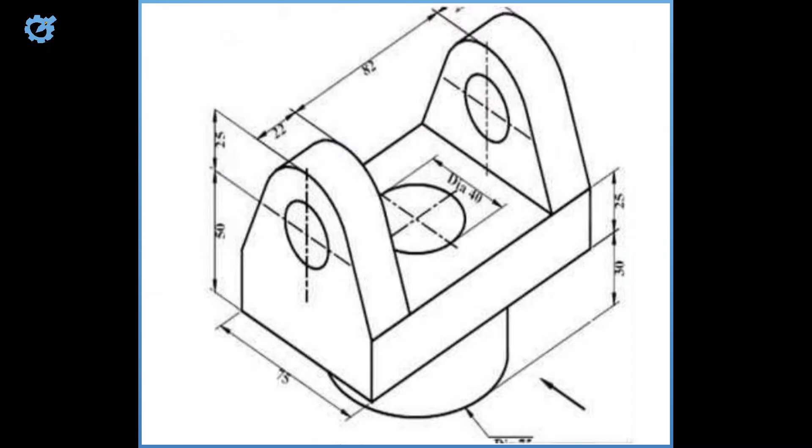Right, for today we'll be considering the problem as displayed on the screen in first angle orthographic projection, and our front view is going to be taking the direction of the arrow itself. So to place my front view, the very first thing I'm going to do is to produce a thin horizontal line in this order, as you can see on the screen. That's it, that horizontal line in that order.

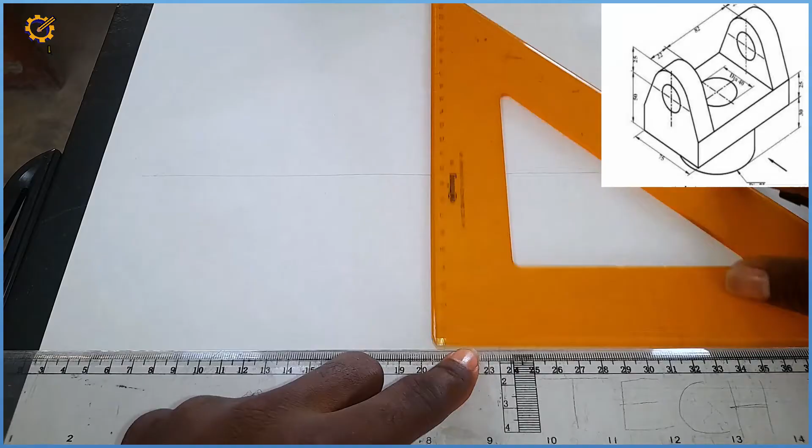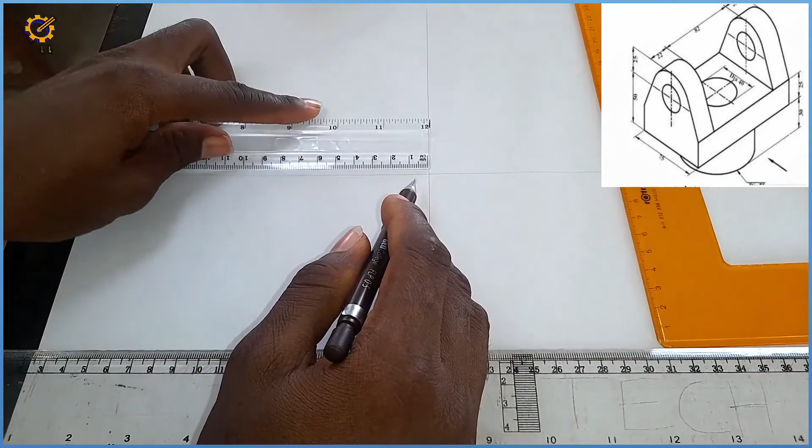Then I'm going to produce a vertical line to it like this in this order also. So that is settled like that. So what's the next thing I'm going to do? The very first thing I'm going to get is the total width of the front view. I'm having a mark of 22, 82 and 22, so that is 126. So from this area here, I'm going to measure a length of 126 towards my left hand side. So 126, which is this. I have that mark of 126 like that.

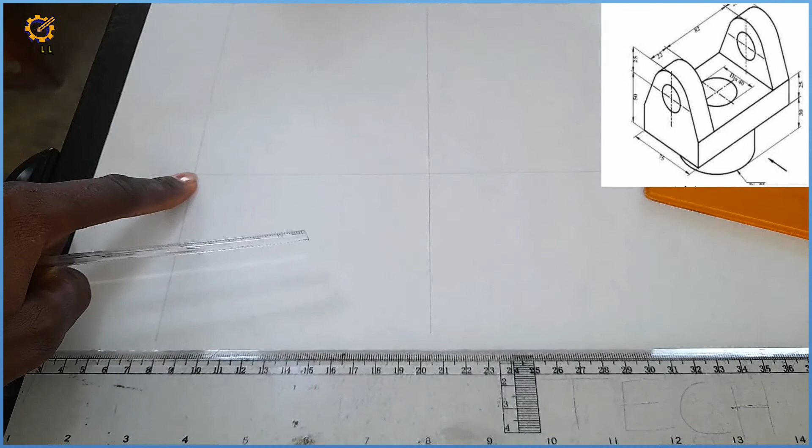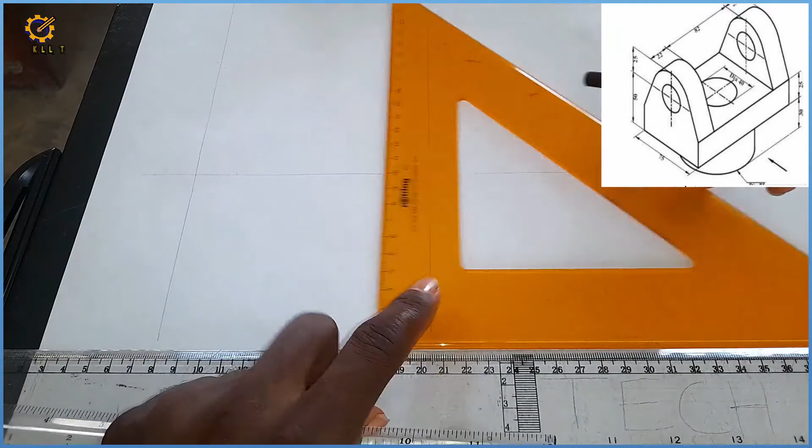So I'm going to project it vertically. So this mark to this mark is 126. Take note of that. Now from this edge, I'm going to measure a mark of 22, which is this. And from this end here inwards, a mark of 22, which is this also. So those marks of 22, I'm going to project them vertically also. So that is settled.

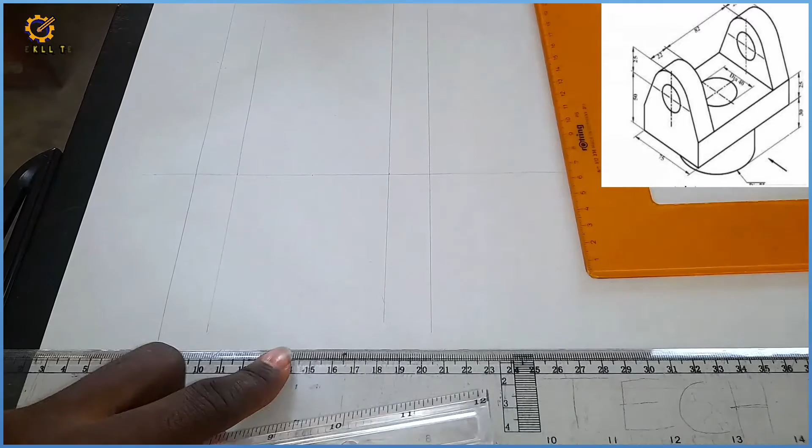So I'm going to get the midpoint of this width of 126, and that is going to be 63. So a mark of 63, which is this. Then I'm going to project that mark vertically. All of these lines I'm drawing are faint lines. They are thin continuous lines.

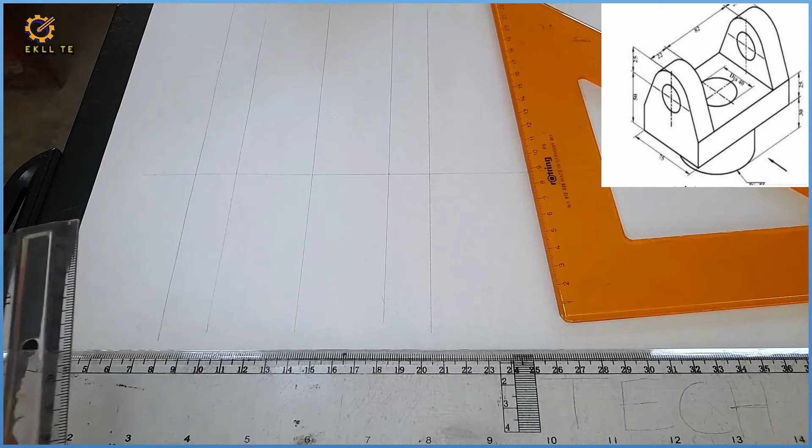So after doing that, the total height of my object here: the cylindrical part under the object is a diameter of 75, and the height there is 30. So height of 30 together with the thickness of the base, which is 25, and the 50 upward, that's 75 plus 30, a height of 105. Total height of 105. So from anywhere on this vertical line, I'm going to measure a height of 105 with my ruler, which is this. Can you see that? So I pick that mark of 105.

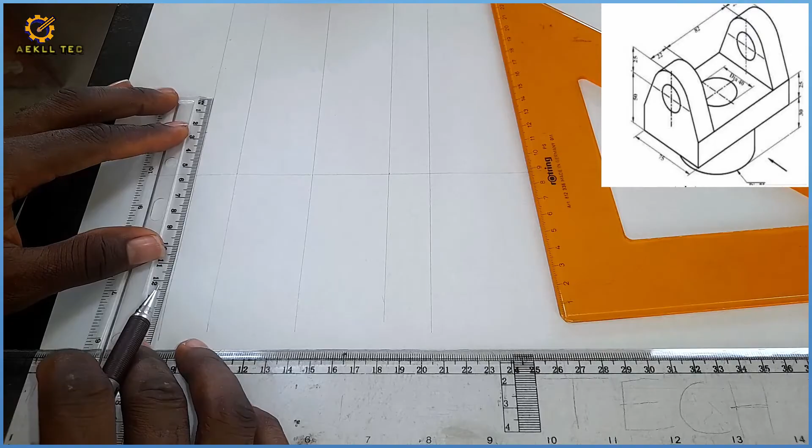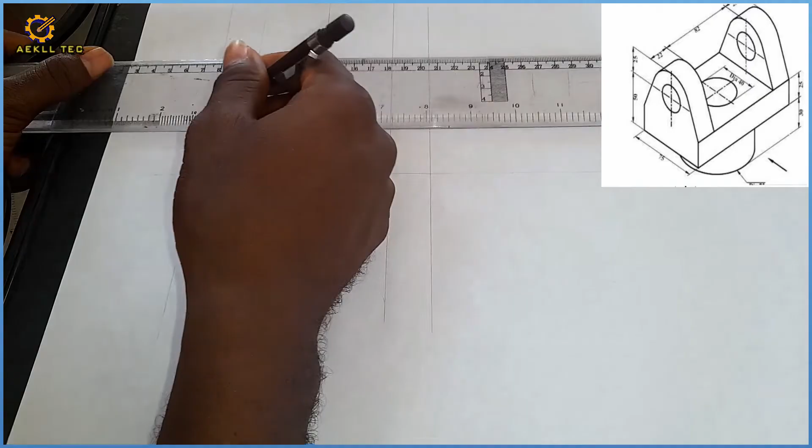From this line, I'm going to measure a height of 30, which is this. Then from that mark of 30, I'm going to measure a mark of 25, which is the thickness of the base itself. So each of these points I measured vertically will be projected horizontally. First, the mark of 30 is going to be projected horizontally like this. The mark of 25 here will be projected like this, and the mark of 105 will be projected horizontally like this. So take note of that.

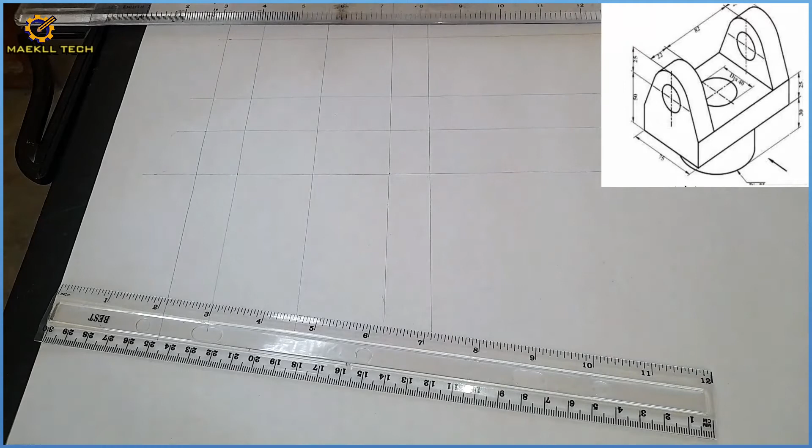Now the cylindrical part under the base is a diameter of 75, and that is going to be a radius of 37.5. So with my compass, I'm going to pick a distance of 37.5. And that is it.

I'm sorry for the noise. My place is close to the airport. Please, I'm sorry for that.

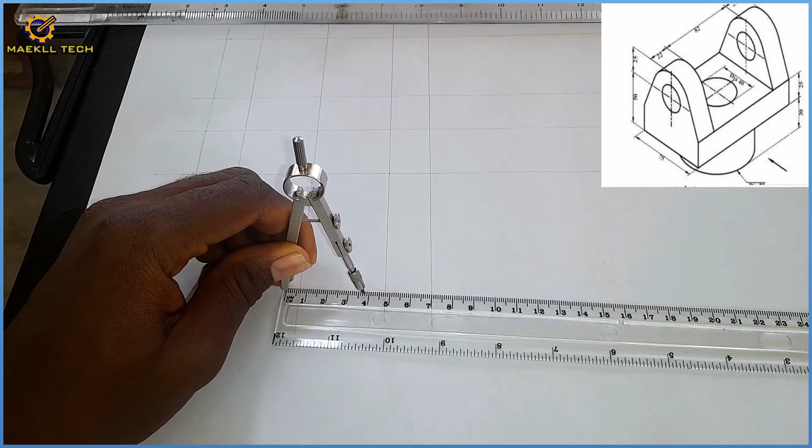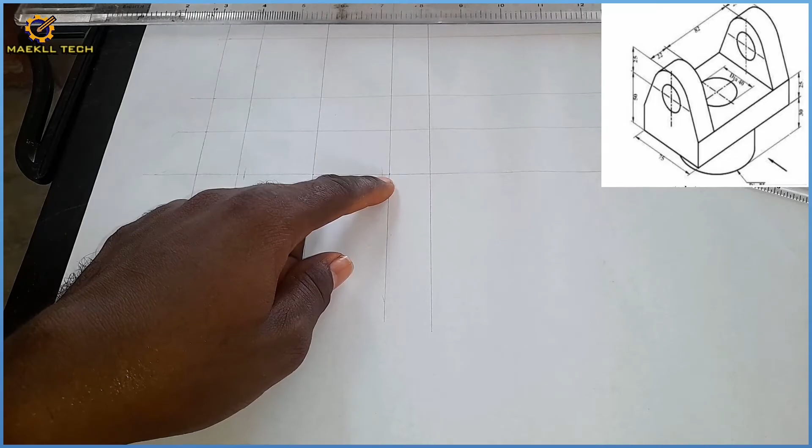So I have my 37.5 on my compass. Take note of this. From this point here, I mark right and left. So the distance from here to here now is 75, as it is on the screen. So what am I going to do now? I'm going to project that mark like this.

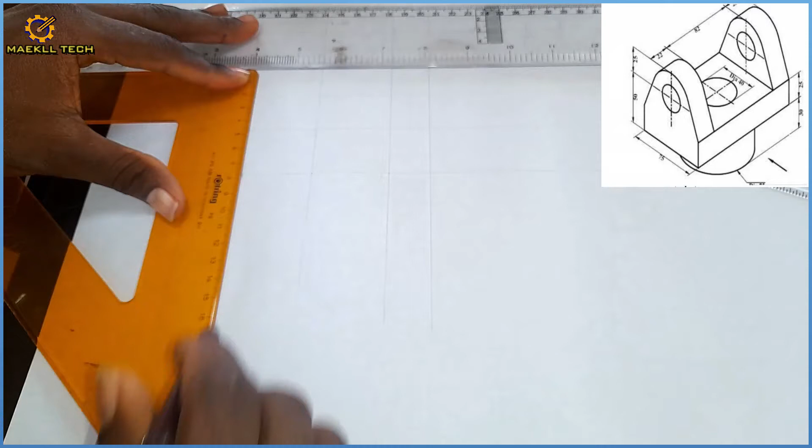Take note of this. I told you the height of that cylindrical part is 30, and here to here is 30. But still I'm going to project it from the mark of 30 downwards, faintly first, then like this also. So I think I can thicken this area like this now. Let me thicken it, and the whole of this area like this.

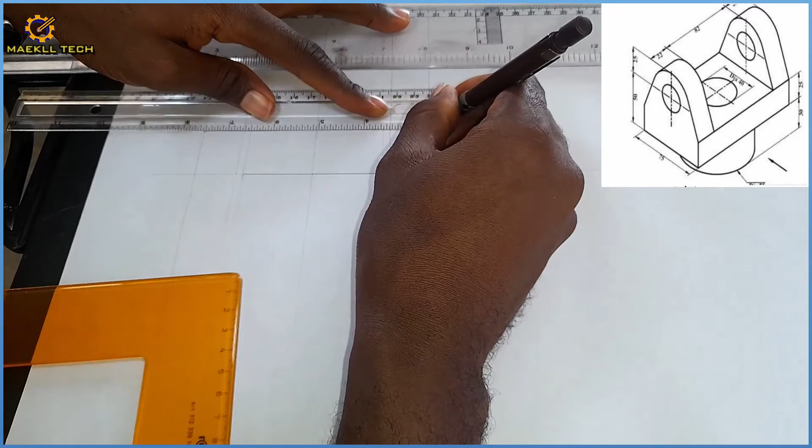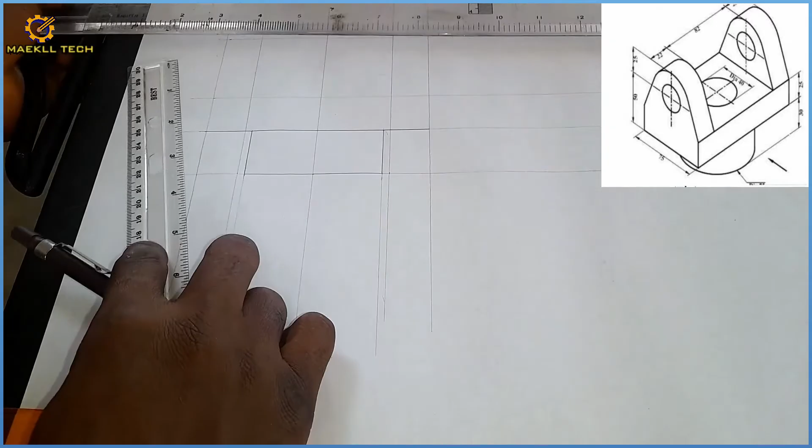All right, so likewise this will be thickened, and this will be what? Thickened. Okay, you see it's coming up bit by bit. Okay, so I'm going to actually enclose this area like this. Take note of that also, like this.

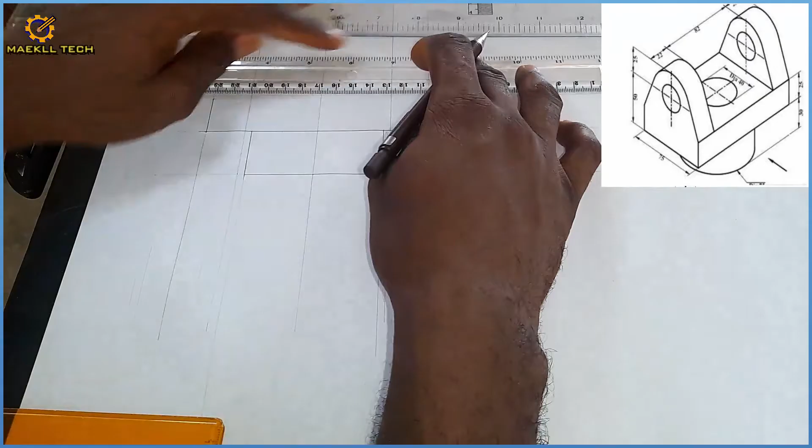All right, so orthographic projection is one of the cheapest concepts in drawing, okay, because it is what you see that you draw. So don't make life hard on yourself. It is what you see you draw. Now take note, you notice that on this base we have a circle of diameter 40, and that circle is all the way through to the bottom here. So diameter 40, that will be radius of what? Radius of 20. So I'm going to pick my ruler.

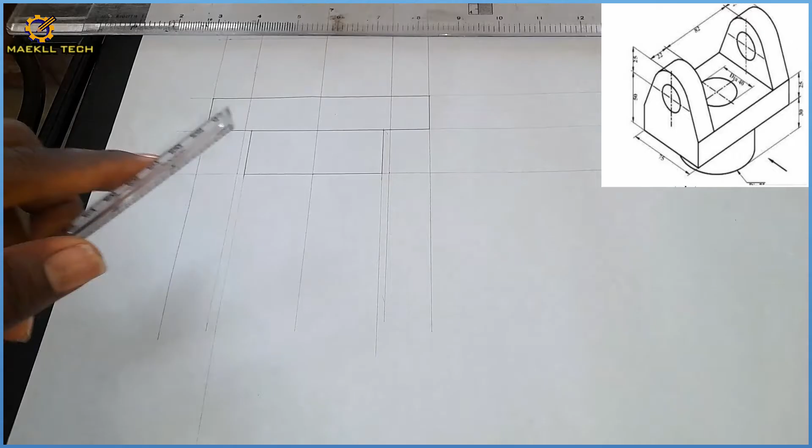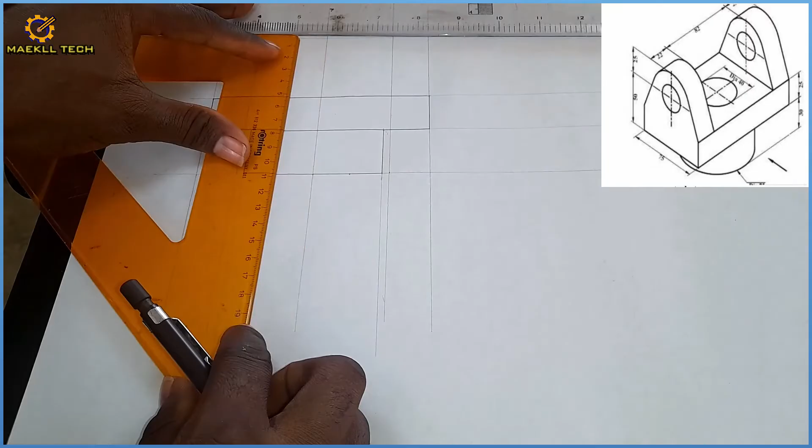With my ruler now, from this midpoint, take note of this, I measure 20 towards the right hand side and 20 towards the left hand side. So 20 plus 20 equals to what? Equals to 40. Take note of that. So I'm going to project that also like this. I'm going to project it all the way down faintly, and hey, sorry, I've drawn rubbish over there. I'm going to correct that. So I'm going to project it all the way here also, downward faintly.

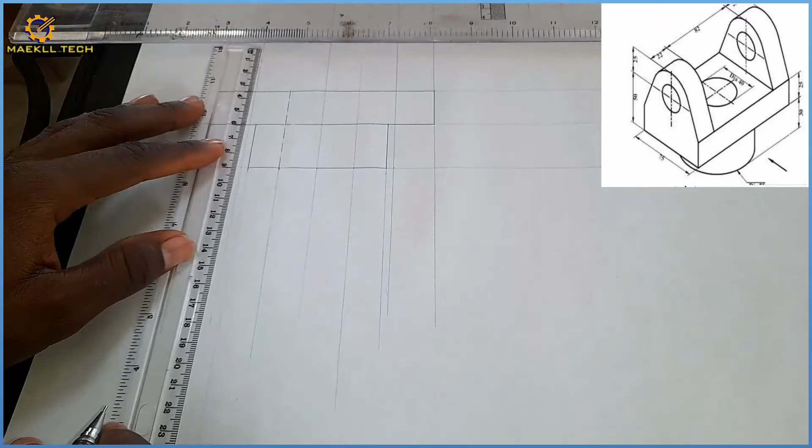Okay, now distance from here to here is the 40. I can't actually see this hole from the outside, but if I check this object from the plan, I can see the hole. So on this front view, that area is going to be what? It will be hidden. So I'm going to represent it with short dashes. Okay, all right, with my short dashes. So take note of this. You see in that order. Do you see that? So I'm going to do the same thing here, that mark of diameter 40. So do you take note of that? So that is how this area is going to be like that.

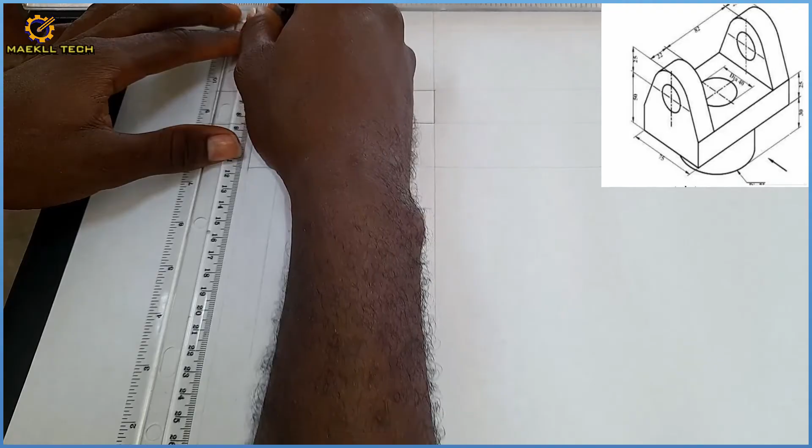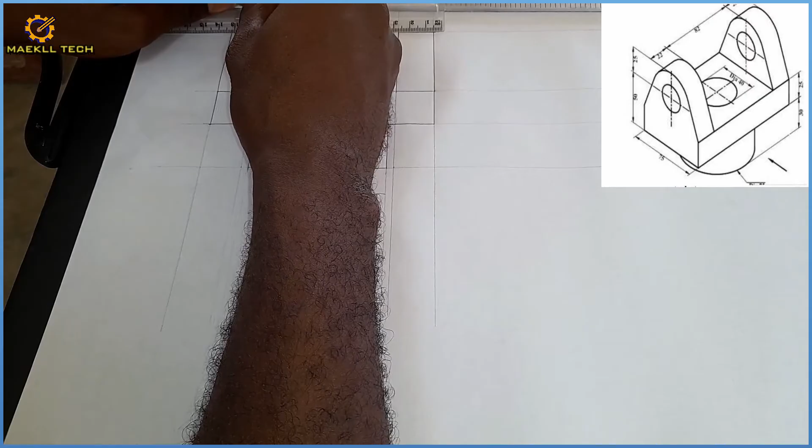Are you following? Now, to finish this area at the top, I'm going to thicken this like this. Take note. It's going to look this way, and this to this mark right here. Take note of that. This like this, then this from the top to that level. So I'm going to enclose this like this. Okay, and I'm going to enclose this like this. I'm going to enclose that like that.

So now on this front view, on this area and this area here, if you look at the object, we are having two cylindrical holes there. Okay, and we are not given the dimension for those holes. So I'm going to assume the diameter for that hole to be diameter 25. So take note, I am producing this drawing on a scale of 1:1. I am producing it on a scale of 1:1.

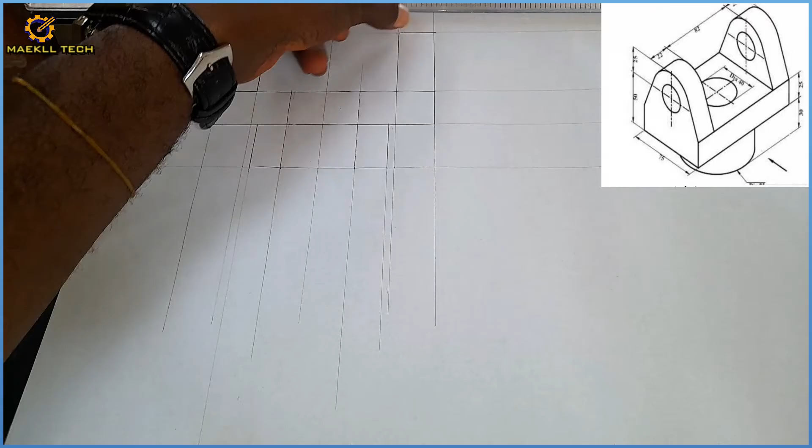So if you have to produce your own on scale of 2:1, you are going to multiply every dimension given here by 2. What does that imply? That implies that this area to this area, that is 22 on that question, will be 44 when you want to draw it on 2:1. This area to this area, that is 82, is going to be what? 164 on 2:1. Take note of that. All right, so I'm drawing this on 1:1. So the next procedure is this.

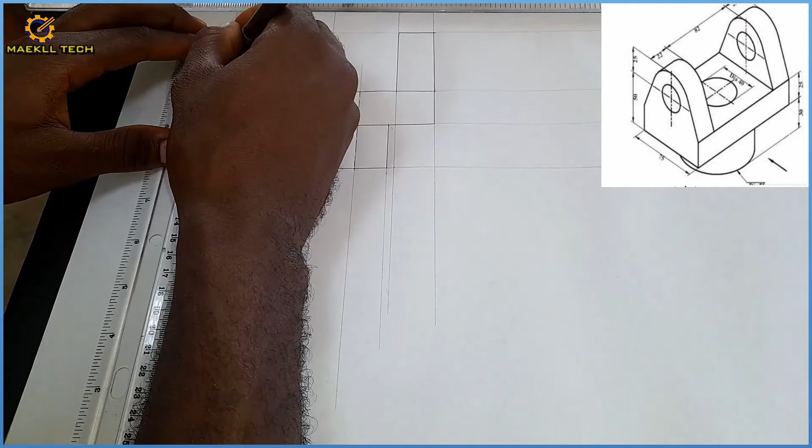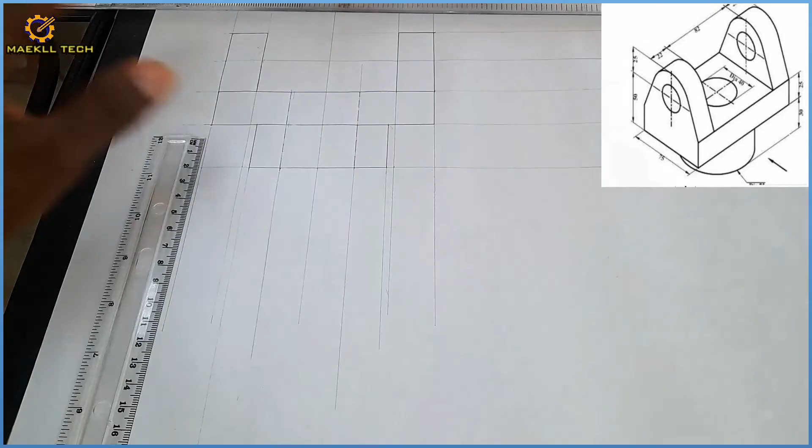From the top here, I'm going to measure a mark of 25. Okay, I'm going to measure a mark of 25. So I'm going to project that mark of 25 horizontally like this. All right, take note. So I project it faintly. Let me increase the texture so that you can see it clearly. So you can see that line now. Okay, now from this line here, take note, from this line,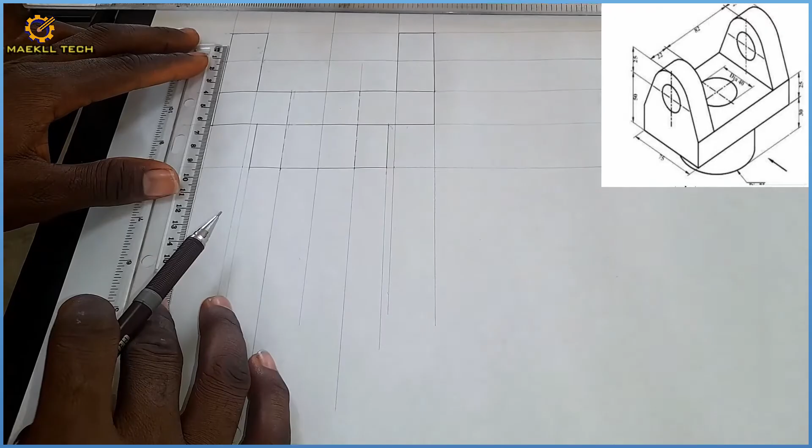I'm going to measure a mark of 12.5 upwards and downwards. 12.5 plus 12.5 gives me what? Gives me 25. So from this line, I measure a mark of 12.5 upwards and 12.5 downwards. So each of those marks, I'm going to draw them what? Horizontally, faintly. I project them horizontally, faintly, and like this also.

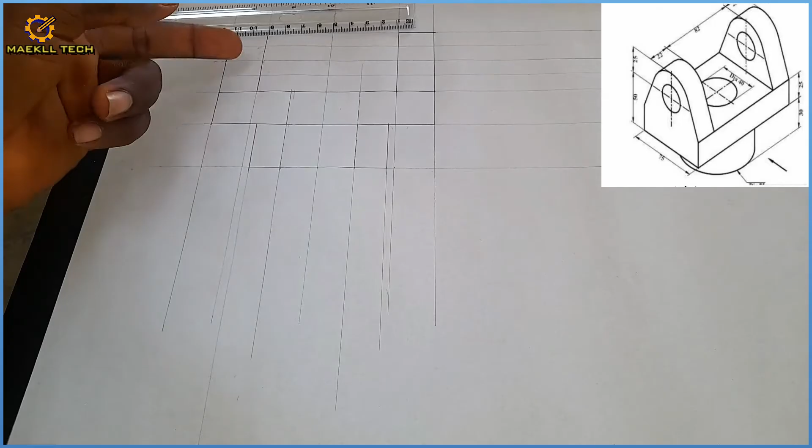So having done that, I'm going to pick my ruler. These holes that I told you are on this area here, we can't see them from the front view. So I'm going to make them what? Hidden, with my thin short dashes. Okay, hidden. So it's going to be like this. You see that? Okay, and like this.

Okay, the same thing on this other side here. Okay, and here. So that is our complete front view like that. Okay, so what I have here is my complete front view. So you can just put your dimensions and the likes. So what is here is now our complete front view.

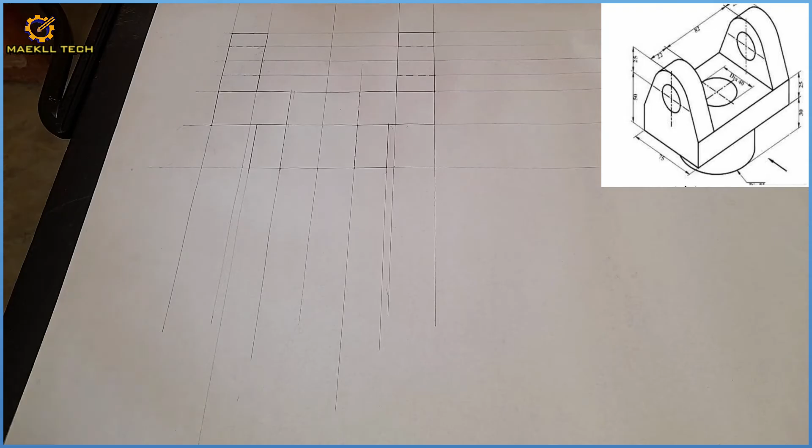So the next thing is to produce the plan. And before I produce the plan, from this base here, I'm going to measure a distance of 10 millimeters. Take note, and that is going to be this 10 millimeters. Okay, with that distance of 10 millimeters, I'm going to project it horizontally like this. Take note of that. All right, I'm going to project it horizontally like that.

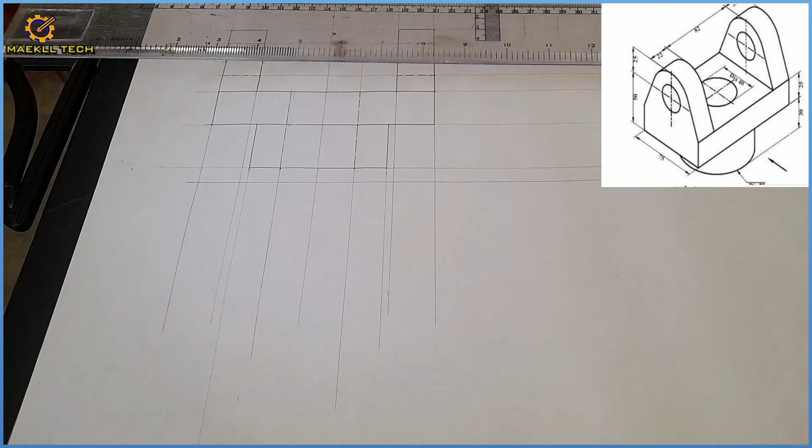Now our plan, the width on our plan is what? Is 75. The width on our plan is also what? 75. And if it is 75, I'm going to pick my ruler from this area here. I'm going to measure 75 mm downwards. 75 mm, which is this. Okay, from this mark to this area is what? Is 75. Take note. So I'm going to project that horizontally, faintly first. Okay, horizontally, which is what? This. Are you following it?

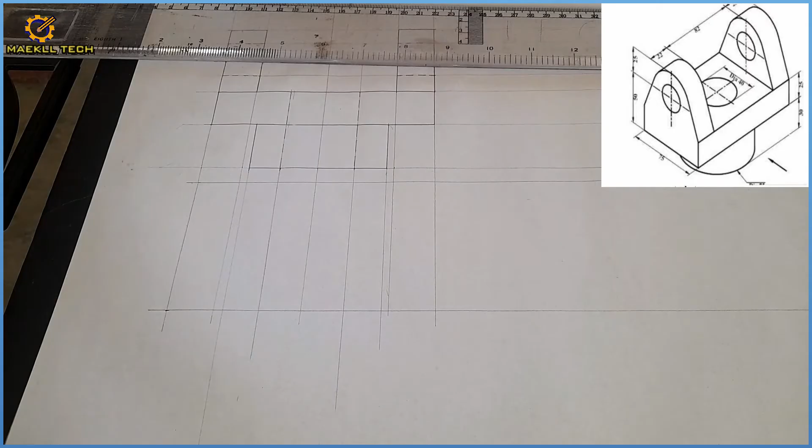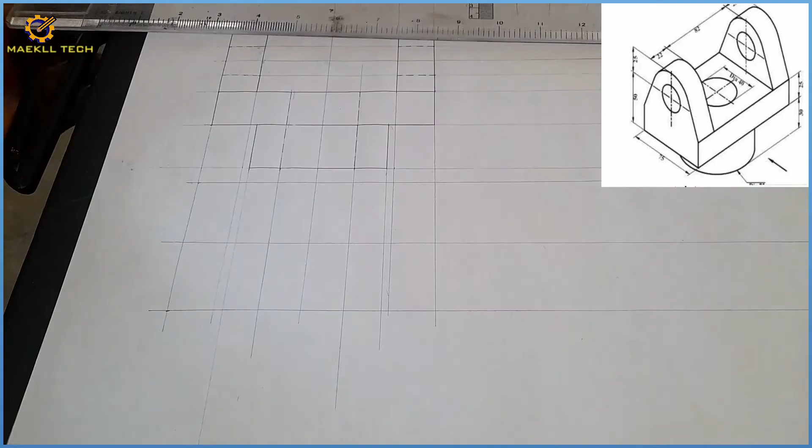Okay, so I'm going to actually get the midpoint of this 75, and the midpoint is going to be 37.5. So with my compass, I measure 37.5, which is this, and from here I mark. You see that? So having that mark, I'm going to project that mark horizontally also like this. Okay, that's 37.5 horizontally like this, faintly. All right, are you following? Now the very first thing is this.

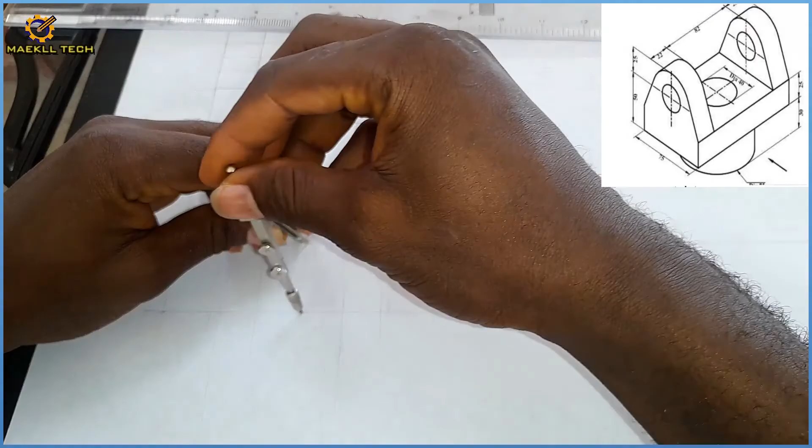I'm going to pick my compass with radius 37.5 on my compass. I know this object is at the bottom, but from the top I can't see this cylindrical part on the bottom. I can't see it from the top, so I'm going to make it what? Hidden. So with my compass, I'm going to draw a full circle, but with hidden line, with thin short dashes. Okay, so like this.

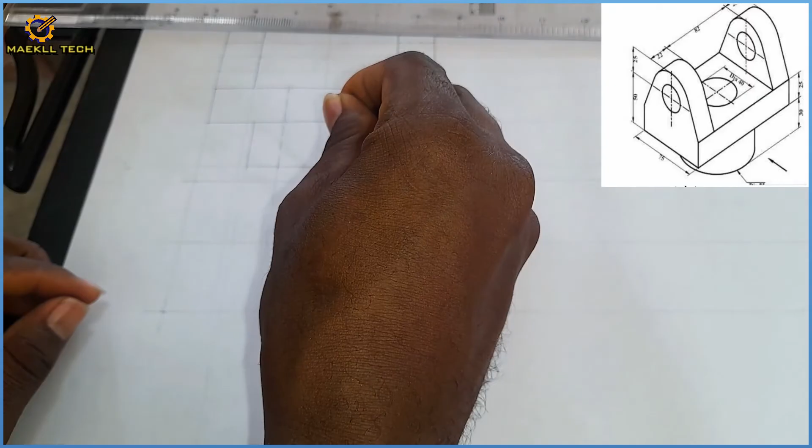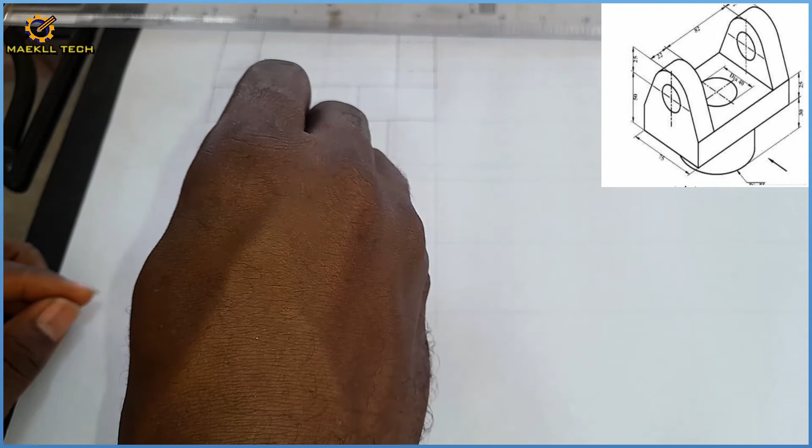So, are you seeing what I'm doing? Yeah, please take note and be careful. And remember, I told you I am producing this on a scale of what? 1:1. I'm producing on a scale of 1:1. That's it. You see that?

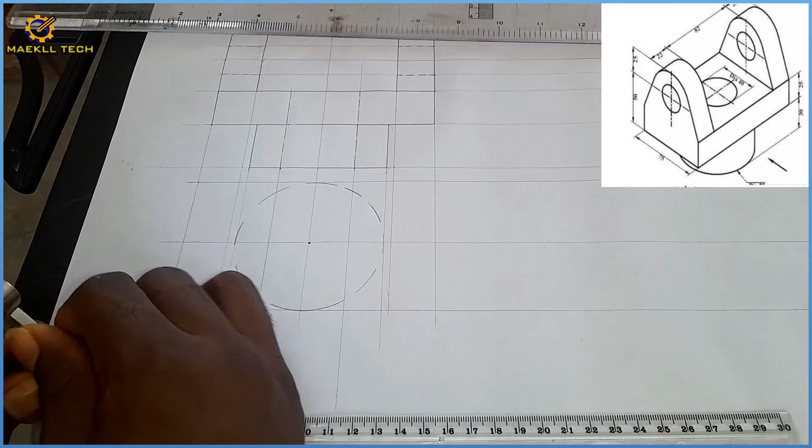Okay, now next thing is this circle of diameter 40. I can see it in full. So I'm going to pick my compass and pick radius of what? Radius of 20. I can just place my compass and adjust it all the way down. Okay, like this, to pick this radius here. That's radius 20. With radius 20, I draw this boldly. You see that? I draw that with radius 20.

Okay, so the next thing is picking my pencil and my ruler. I'm going to take in this rectangular frame here like this. Hope you see that. I'm going to take in this also like this. Alright, take note of what I'm doing, please. I'm going to take in this area. Please be careful with the lines. Okay, like this. And I'm going to take in this area also like this.

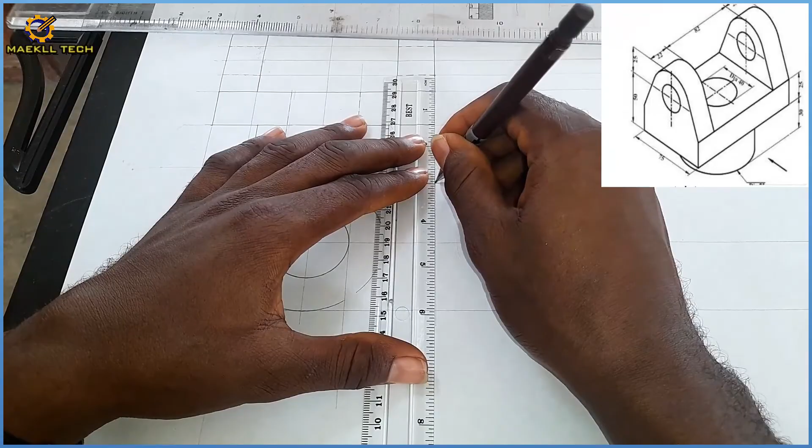Alright, so having done that, I'm going to take in the horizontal area at the top like this. And I'm going to take in this area also like this. So that is it. Okay, but we are not through. This area will show on our front view. This circle of diameter 25, I'm going to show it on my plan also. This area here, this is it on my front view. This area here to here, this is it on my front view also.

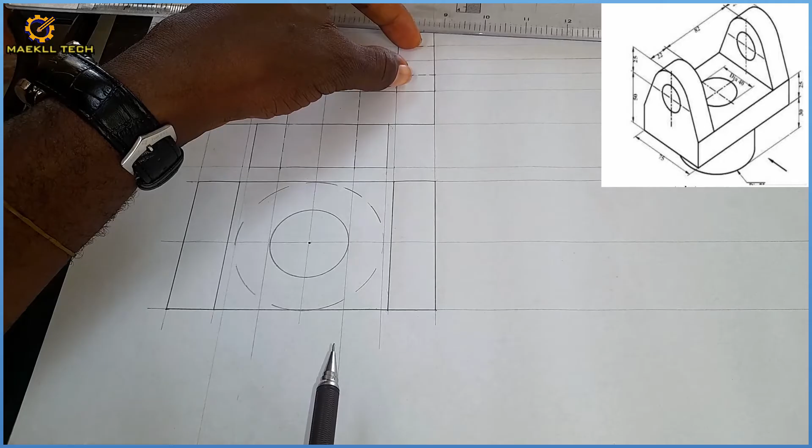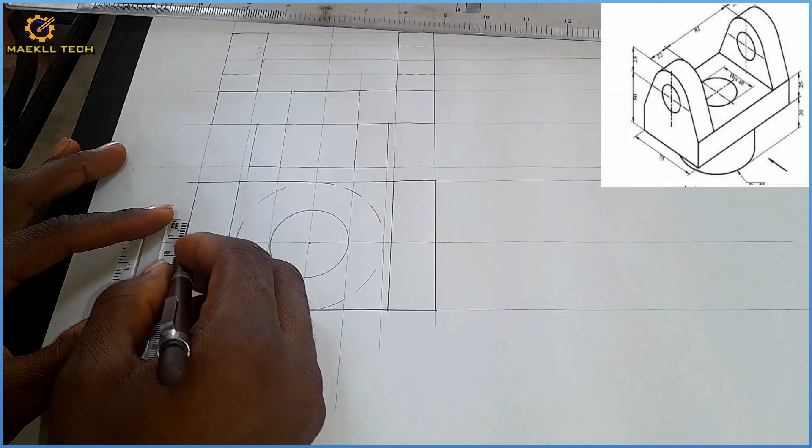Take note. So this circle we are seeing hidden on our front view, I'm going to show it on my plan also as hidden. And we said that circle is diameter what? Diameter 25. So from the center line on this plan here, I'm going to measure 12.5 upwards and 12.5 downwards. Okay, which is this. 12.5 upwards and 12.5 downwards. So I'm going to project those lines horizontally, faintly, 1 and 2.

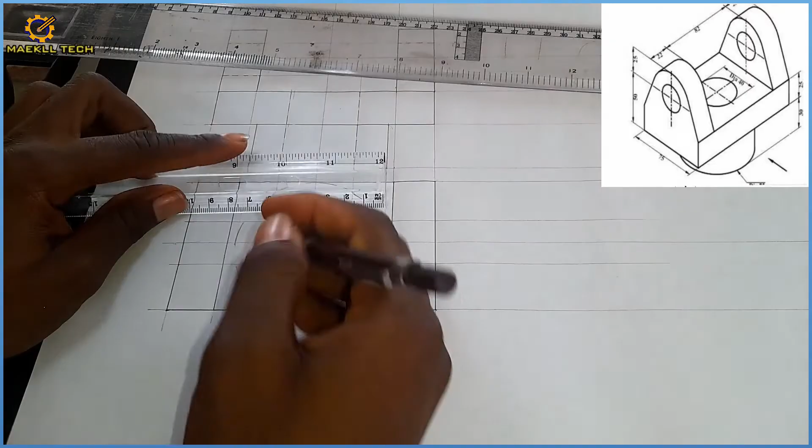So after doing that with my ruler, I'm going to make this what? Hidden line also. You see that? Then right here also. You see that? Okay, it is hidden. This and this are hidden lines. I'm going to do the same thing on this other side here. Okay.

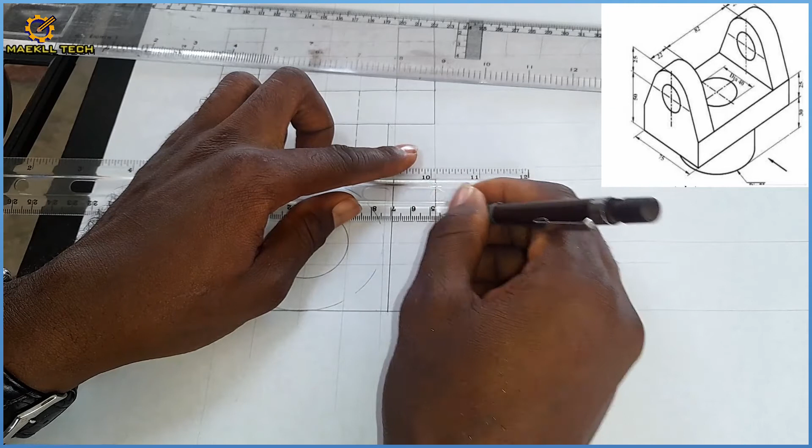And right here also, it's going to be what? Hidden line. So take note of that. Okay, so as it is now, I have a complete front view and I have a complete plan view. Now you remember the last picture or video I sent you. I told you in first angle. Please watch the video I sent you earlier on. It is going to actually explain this concept a lot. Okay, so I was explaining something in the last video I sent to you.

Okay, so in first angle, take note of this. In first angle, this is the chart for first angle. We have something like this. So right here we have front view, right here we have plan. Okay, now on this area we'll be having left, and on this area I'll be having right. Okay, this chart is for what? It's for first angle. Yeah, this chart is for first angle.

Okay, now if you take note of the object on the screen over there, your end view is on where? Is on the left hand side. Look at it. The end view you are seeing is on the what? Is on the left hand side, and first angle says whatever you see on the left is what? Left here. This is the chart for first angle.

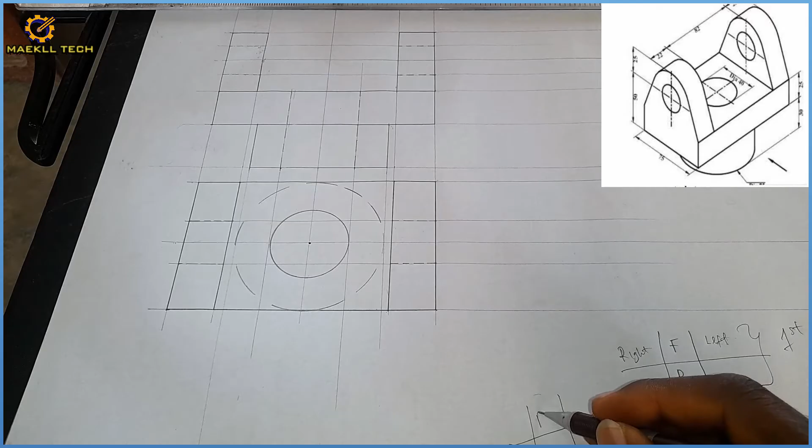Take note of this. This one is for third angle. See this? I'm having what? Plan. I'm having front. I'm having what? Right. And I'm having what? Left here. This is for third angle. Okay, this is for what? For third angle. Let me adjust the camera for you. So take note of that. Do you see? So this right here is what? Third angle. While this is what?

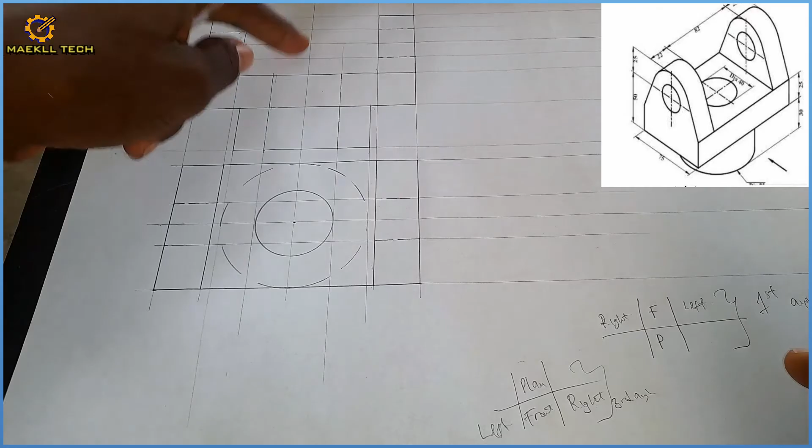First angle. And this very problem we are solving it in first angle. So this is the chart we are using. So that's why I have my front here, my plan here, and my end view will be here. Yeah. So my end view is on this direction. Do you get it now? Then these two views are going to sit right here, while my end view will sit here.

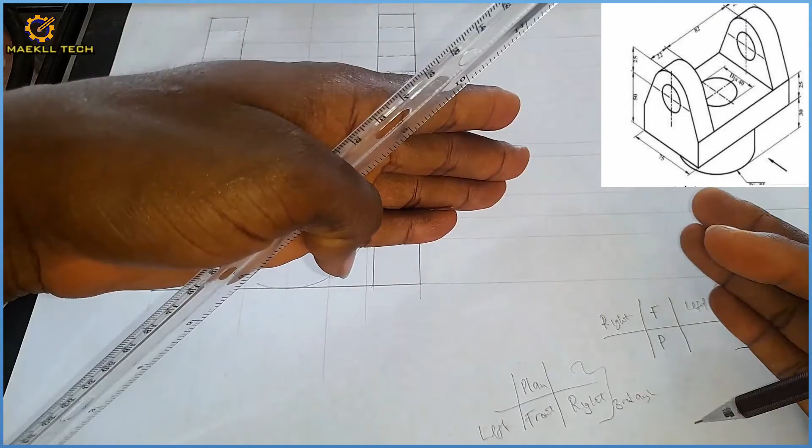But since my end view is on this direction, you know, this is the direction where the arrow is on the question, which is our front view. Then this area will be my what? Our end view. So since my end view is here on the left hand side, first angle says left end view will be right here, and that's why we are placing our end view here. So take note of that.

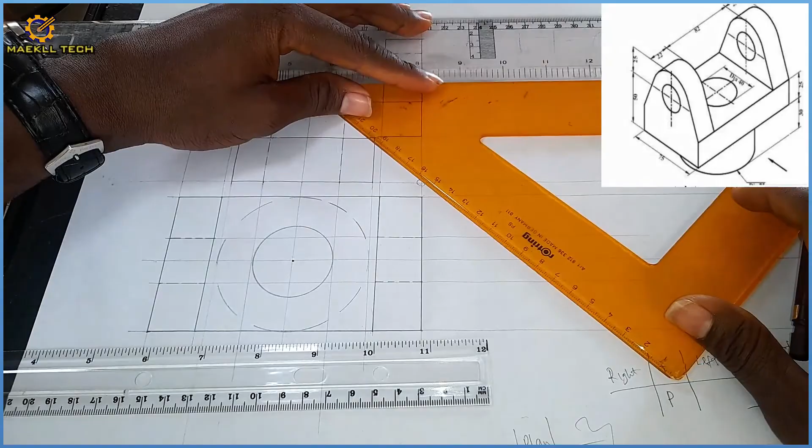All right. So now to draw my end view, it is actually cheap, like plantain chips. What I'm trying to say is that it is actually easy. It is not hard. It is very, very easy. So the very first thing I'm going to do is from this edge here, take note of this area I circled lightly, with my 45 degrees set square, I'm going to project a line from this junction. You see, with my 45 degrees set square, I'm going to project this downward like this. Faintly. Do you see that?

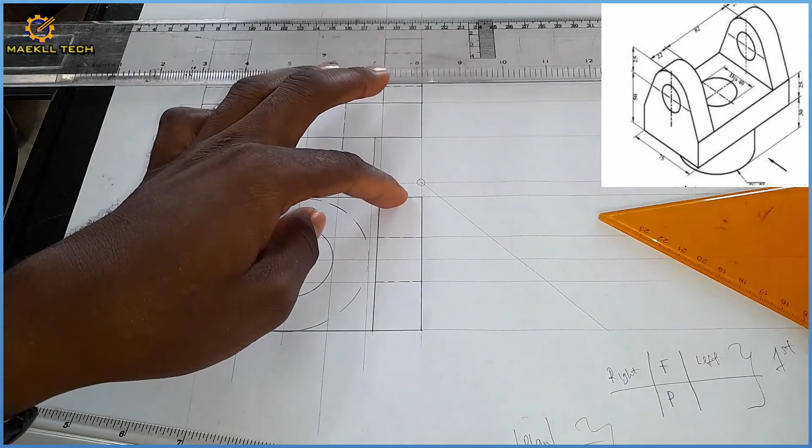Faintly. Then after doing that, take note of this. Every horizontal line I'm having on this area, wherever they touch this inclined line, I will project them upwards. Listen to me again. All horizontal lines I have here, wherever they touch this inclined line, I will be projecting them upward. So this is what I'm trying to say. So let me do the first one for you so that you can see.

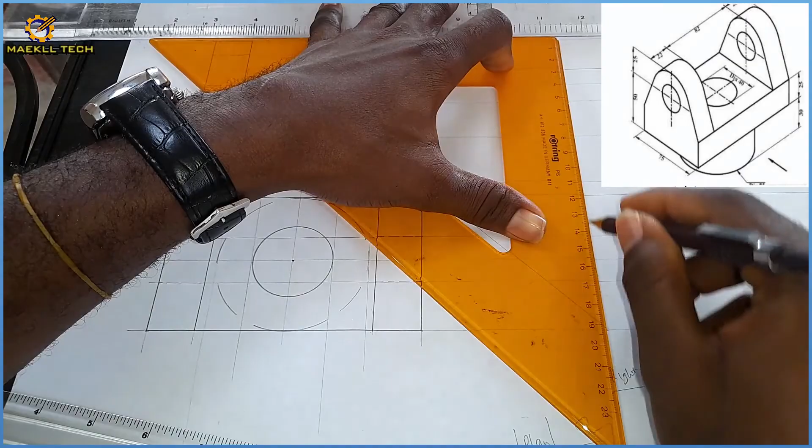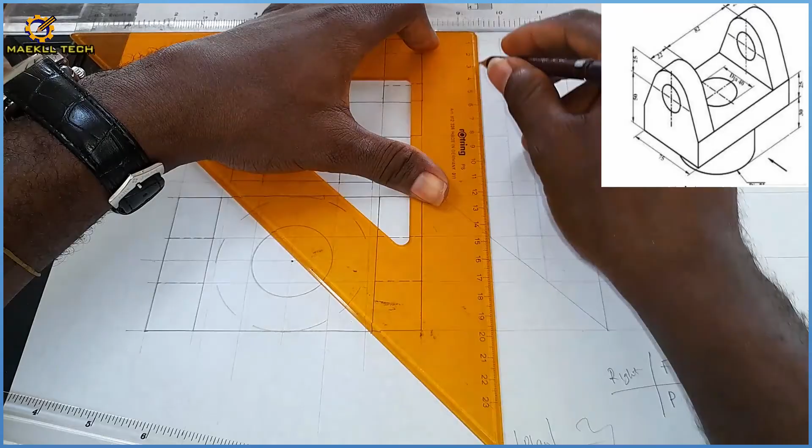Alright, now this horizontal line touches this line here. So I'm going to place my set square right there and project it faintly upwards. Do you see what I'm saying now? Take note of that. Alright, so I'm going to do the same thing right here. I'm going to project it upwards faintly. The same thing right here, upwards faintly. The same thing right here, projecting it upwards faintly. Then right here also, and I'm going to project it upwards faintly.

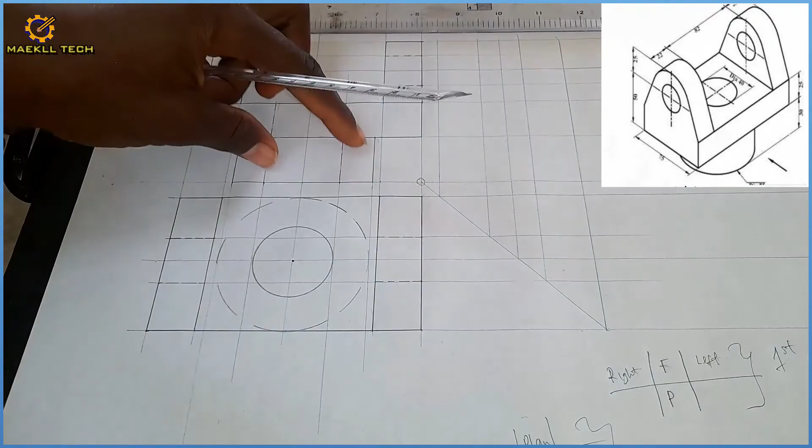So now, how do I fix my end view? How do I fix my end view? Yeah, it is cheap like plantain chips, and it is easy as ABC. So just take note of what I'm doing. Okay, so first of all, this cylindrical bottom, this is it on my end view. I'm going to take that out first.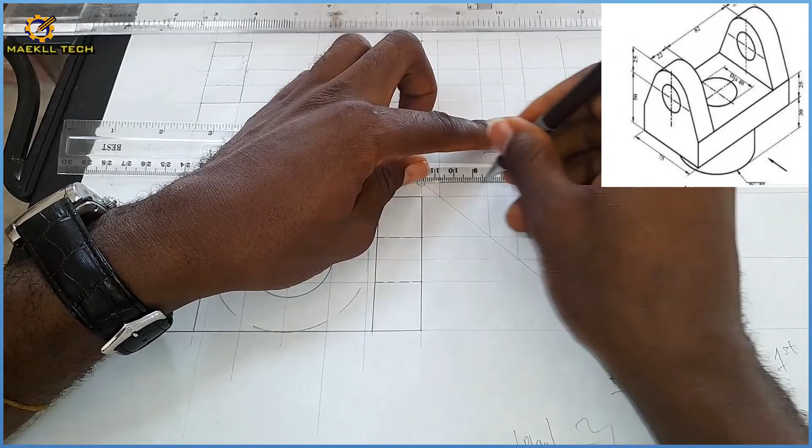Okay, so on this end view, I don't really need to measure a lot of things here because everything is already traced out. And that's the essence of me saying you should watch that video. Watch my videos on YouTube. Watch them. You will see what I actually do there. So maybe you are going to have more understanding of what I'm trying to drive home here.

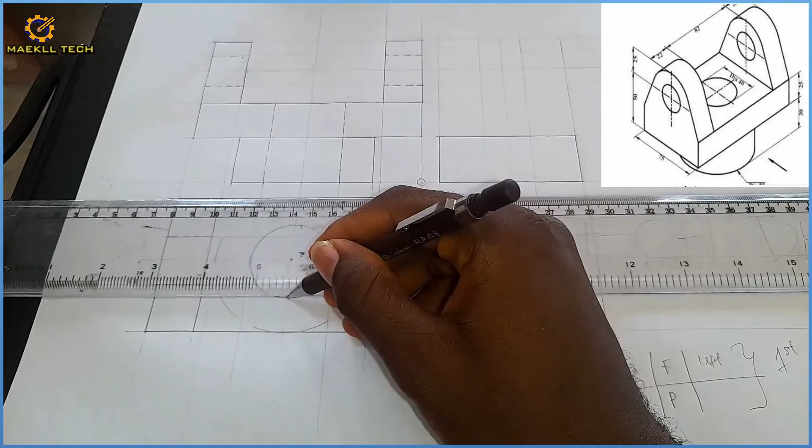Exactly. So now I have this base. So remember this area we mentioned earlier on, this area of 40. Okay, so let me project that also. So I'm going to draw this tangentially to this faintly, touching that line, and this place also faintly touching that line. Okay, now I'm going to actually project them vertically upwards, those 2 points faintly like this.

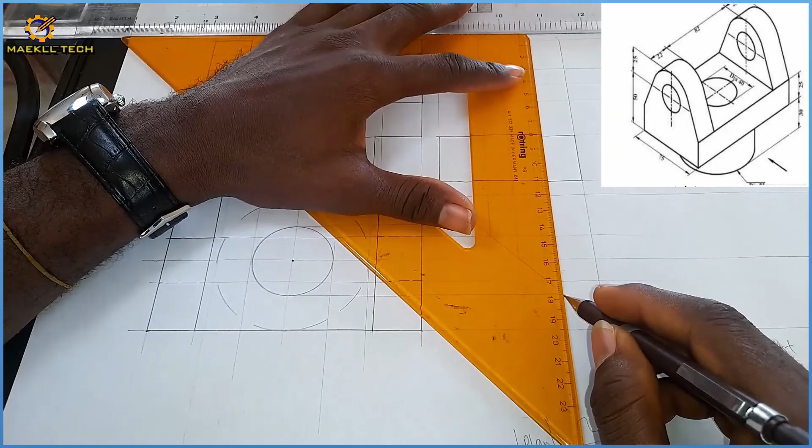Yeah, right here and right here also like this. So as it is now, this to this is 40 automatically, so I'm going to make it faintly. Okay, it's going to be hidden. I can't see that hole, but I know it is there. Yeah, up to this level. I'm going to make it faint up to this level here. Okay, and this also up to that level.

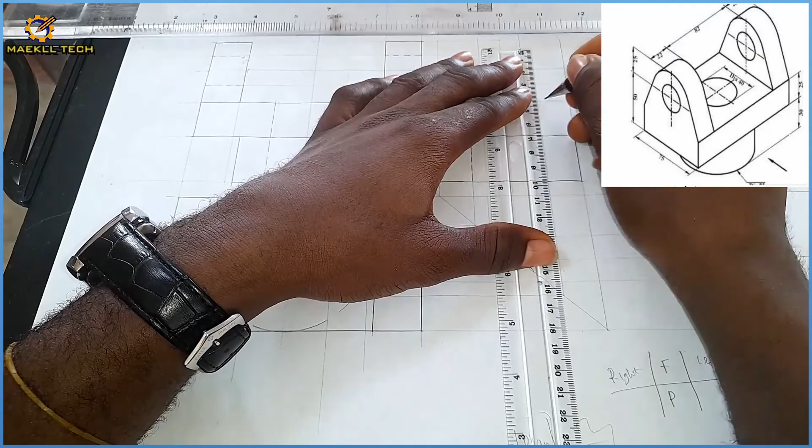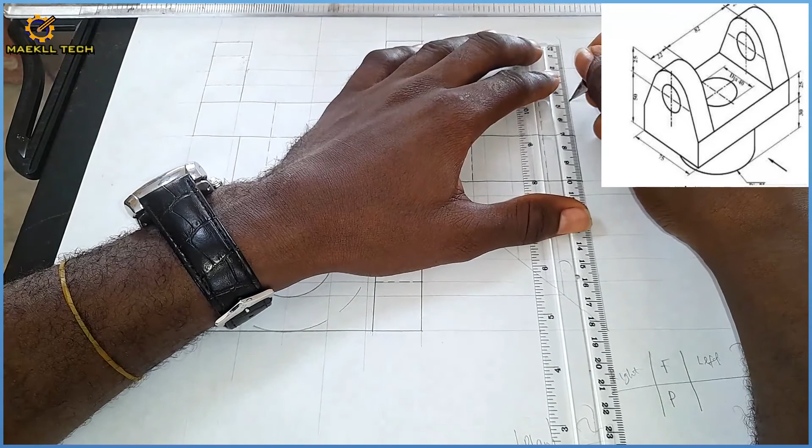Yeah, so take note, this hole can only be seen on the plan. You can't see it on the front and you can't see it on the end, but we know they are there. So that is what I'm trying to actually show you. Okay, so then I'm going to actually join this area like this. I'm going to take this upwards like this. Oh, sorry, I have made this silly mistake. Yes, so this one is going to come here like this, and this is going to come here like this. So this area.

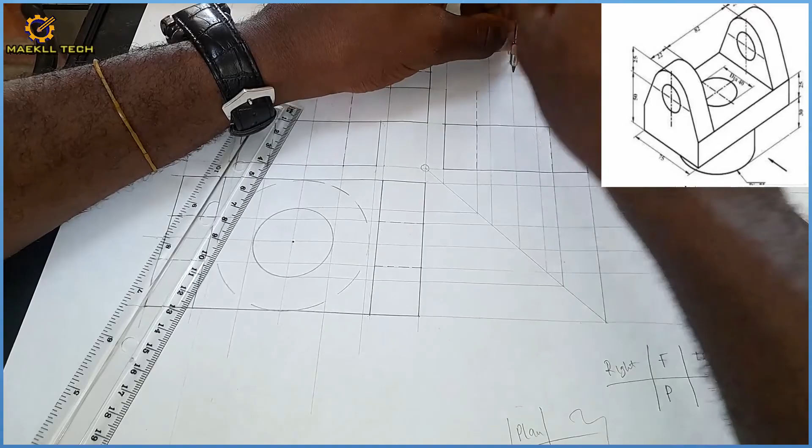Okay, to proceed now, I'm going to pick my compass. So the radius of this area, see where I place my compass, from this area like this, all the way to this area here. That's going to be radius 12.5. Okay, I'm picking radius 12.5, which is this. Sorry for wasting your time. Okay, so that's radius 12.5. I draw this.

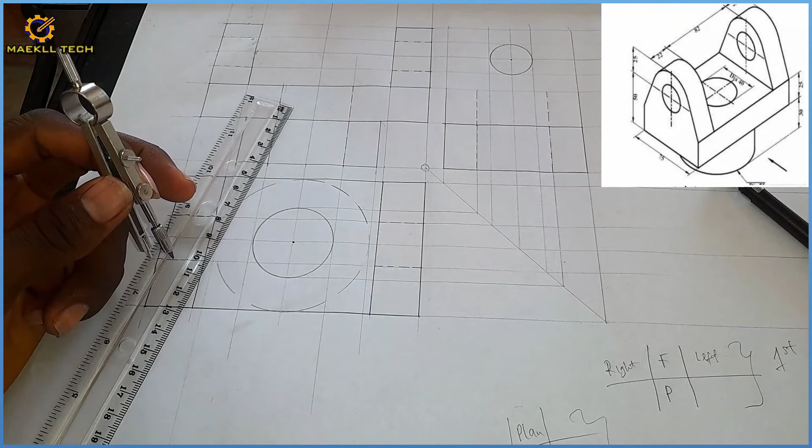So that's the hole I'm seeing when looking at the object from this direction. You know you can see this hole on your end view. So that is the hole there, that hole of diameter 25. That is it right there. And this area at the top, we are not giving dimension for it also. So I'm going to use radius 25 for this mark on the top here.

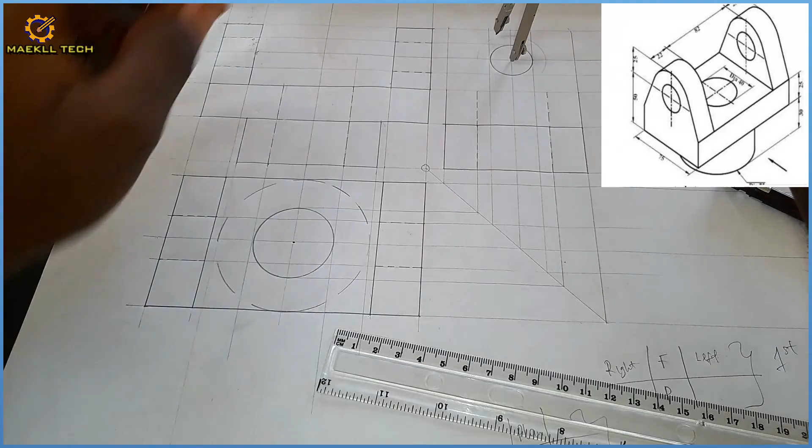Radius 25. So with my compass, I picked radius 25, which is this. With radius 25, I'm going to draw it faintly. Sorry. Just pick this area. Okay. So standing at the midpoint here, extend your compass to the top here, tangential to that area at the top. I draw this.

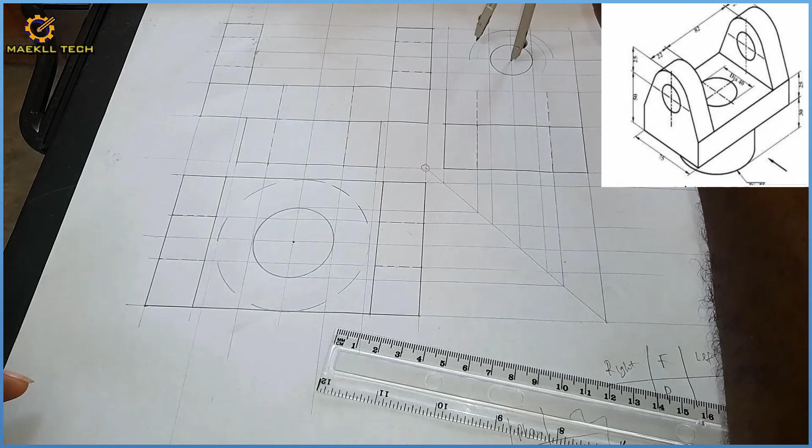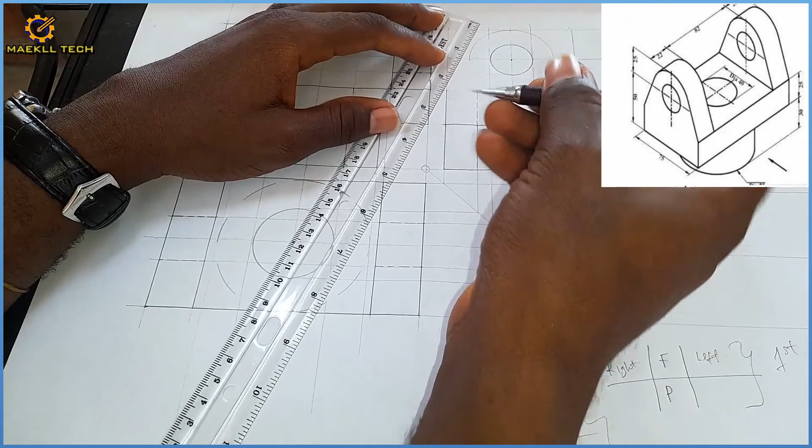So take note of that, right? And that is my radius 25. I draw it faintly first. Okay. So the next thing is pick your ruler. From this edge here, this mark and this mark, tangentially to that radius 25 line, which you drew earlier on. So from this now, tangentially to it, I draw. I make it bold. You see that? And likewise from this end, I draw, making it bold. Okay, do you see that?

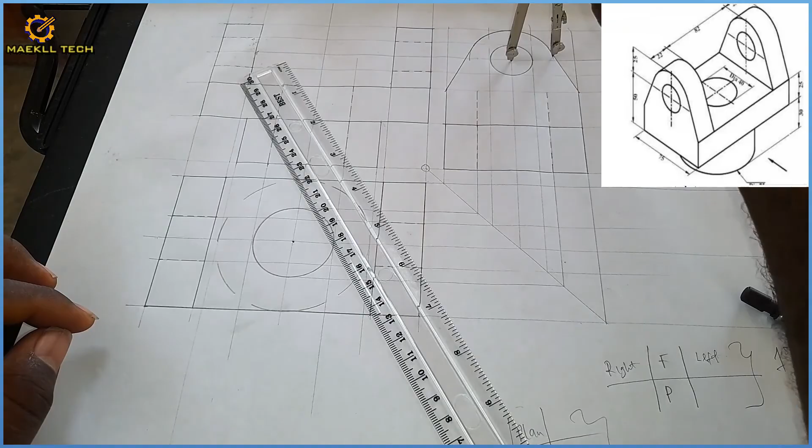So with that now, I can now take in the radius 25, which I measured earlier on, like this. Okay, I can now take it in like this. Then I can't see this area from my end view, so all this area all through will be hidden. It's going to be hidden like this.

All right, so this is the complete orthographic projection. Right here is your front view, right here is your plan, and right here is your end view. So you can fix the dimensions by yourself so that I won't waste much of your time.

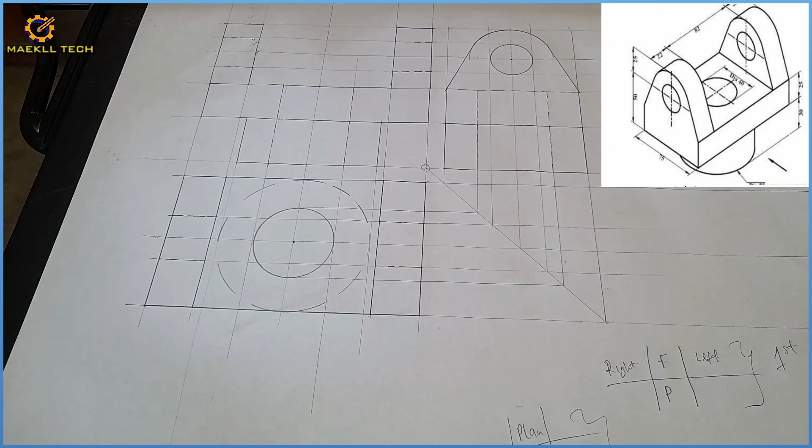So don't forget, I told you this drawing you are seeing here is on scale of 1:1. If you are doing it on scale 2:1, you multiply all the dimensions I used there by 2. Exactly, you multiply them by 2.